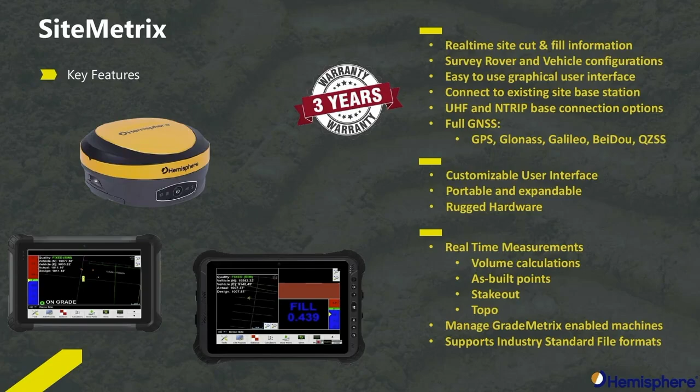The one unit controls your whole site. So what are the benefits of these features shown here? The first and major benefit is the ability to complete your own grade checks and stakeout work.

Jumping forward in the presentation, imagine if we could get you into a full base and rover solution for less than $350 a week. Keep this in mind as we go through the presentation. How many times do you pay for professional services for grade checking and restaking of marks? What is the minimum survey call-out fee? $750, $800?

If you have 1 day a week where you stake your own points, complete your own grade checks, or mark out your own trench line, you're ahead. This is before even taking into account speed, accuracy, and material savings. I'll give you some examples.

The excavator is ready to start the trench work for the sewer and water on site. What is the exact location of the pipe route? Call the surveyor? Why not set out the culverts and junctions and paint out the route on the ground yourself? The culvert invert has to be at an RL of 10.68 metres.

The excavator has been digging at the site you staked and is at the right depth, you think. Call the surveyor to check the invert, or maybe place your own rover into the trench and confirm that the invert is correct.

Of course, if you have a GradeMetrix excavator system on the excavator, it will naturally be correct already. The dozer has made a couple of passes along the crown of the road, attempting to cut as close as possible to the curb line.

All the pegs are gone. Drama? Call the surveyor? Why not just set the pegs back out yourself? But not before simply walking along the road to confirm that the position and height at the edge and crown are correct.

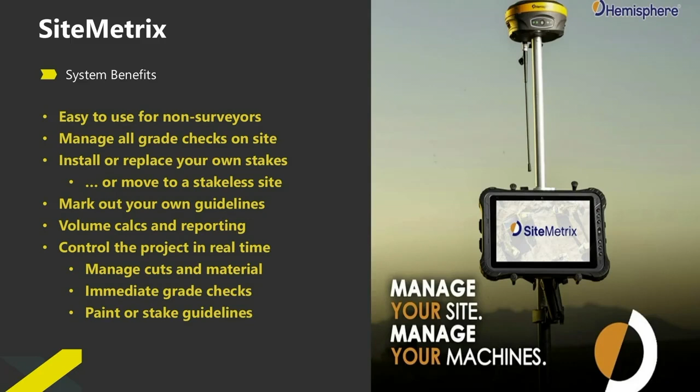Material costs are also dramatically reduced. You're not overcutting, which saves on waste costs and replacement material costs, and you're not undercutting, which saves on rework costs and time. With the SiteMetrix base and rover, you have complete control of your site.

This brings me to the technology section of the presentation. All constellations are provided in the sitemetrix and grademetrix solutions. On the top right, you can see 46 satellites being tracked from American, Russian, European, Chinese, and Japanese constellations. On the bottom right, you can see 22 satellites being tracked from GPS and GLONASS only.

So where is the benefit? On a clear site with no obstructions, there is no benefit. But what about normal working conditions?

If trees are filtering access to satellites, you need as many as possible to guarantee position and accuracy lock. In built-up urban environments, you need as many as possible to reduce the effect of multipath and blockages. And in urban canyons or mine environments, you obviously need as many as possible due to the limited sky view.

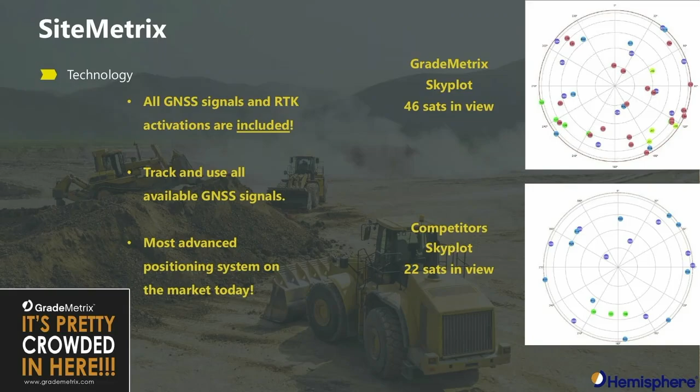The new C631 antenna is the highest level of technology available today. 800 plus channels are available for reception of all constellations as mentioned in the last slide. The receiver can be used with the inbuilt radio to receive corrections from the base or using NTRIP, utilising the inbuilt modem to bring corrections via the cell phone network.

All standard base station corrections are able to be received and transmitted if being used as a base. The system comes with dual hot swappable lithium batteries that allow the unit to maintain operation while batteries are changed and to last for a full 12-hour day.

While the aim is to create a simple and affordable site tool for the non-surveyor contractor or supervisor, full survey functionality is also available on board. A further point to mention here is the 3-year warranty.

Hemisphere has been in the market for many years and is the first choice supplier of GPS components for many OEM manufacturers. We know how to put components together. The rigorous testing we do gives us complete confidence to offer such an extensive peace of mind 3-year warranty.

The system is able to be supplied with either the UT20 7-inch screen or the UT50 10-inch screen. These screens are high visibility, high response touchscreens with integrated Wi-Fi, Ethernet, and Bluetooth, and are IP67 rated for water and dust penetration. The operating system is Windows 10.

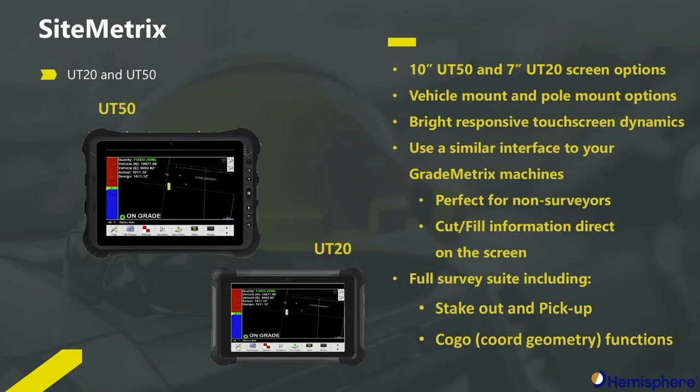We will now present an overview of the operating system of the Sitemetrix solution. Our American colleague Todd Medine has been kind enough to put together the following video to show you the functionality of the system. Note that the American measurement system is inches and feet, but the Australian versions operate in meters and millimeters, as you would expect.

Today, I will be running you through a brief overview of Sitemetrix. Sitemetrix is our site positioning solution used for numerous applications, like providing real-time cut and fill anywhere on the job. This is helpful in verifying accuracy of any machines using machine control, or in a more conventional grade checking format, where the user would write the cut or fill on the stake for non-GPS equipped machines.

Not only can we provide cut and fill, but we can also give the user capability to stake off of line work and points, providing more information like stationing, offsets, and precise horizontal locations like pipe inverts, building corners, and utility locations. I currently have a job loaded and connected to an emulated rover. This is what the user would see on the data collector.

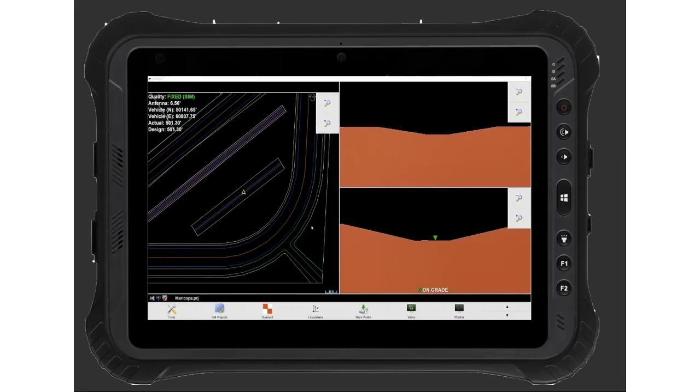The left box is the plan view. The lines represent certain features of the job, just like looking at a set of blueprints. You will see you and the rover represented by the yellow arrow. Wherever we walk, the map will update with the new position.

The text items in the upper left give us optional data like the pole height and the current elevation along with the design elevation. These can both be used to verify the accuracy of the rover in the field by finding survey set stakes and verifying that you match the surveyor.

Notice the north arrow in the upper right hand corner. When holding the data collector, you will face north to orient the plan view to the job. The scale bar on the bottom right will give a user a sense of scale depending on how far you are zoomed in or zoomed out. Notice when I use the zoom buttons, the scale bar changes.

In the upper right hand corner, you will see the cross-section view. This will take a slice of the surface that you're standing on and show you what it looks like from left to right. In this example, it appears to be a flat bottom ditch. The lower right is the profile view. This is similar to cross-section, but shows you a slice of the surface going from behind to in front of you. All three views can be adjusted using the zoom in and zoom out functions.

Watch what happens as I turn to the right. Notice how the cross-section and profile views change to represent the new direction. Plan view is great at showing you horizontally where you are at on the project. Profile and section will show the user what the surface inside of the project looks like in an easy-to-use graphical interface. Typically, the most useful piece of data is shown here on the lower right.

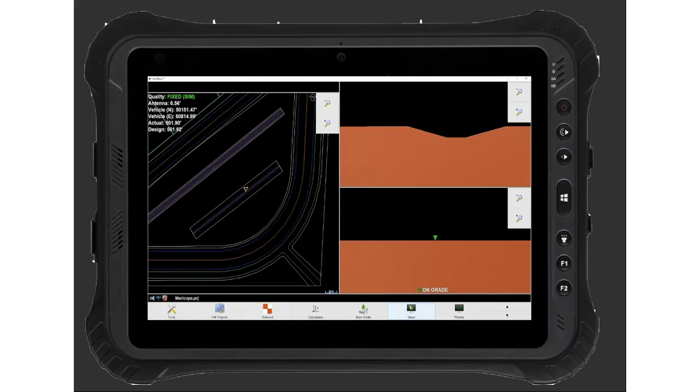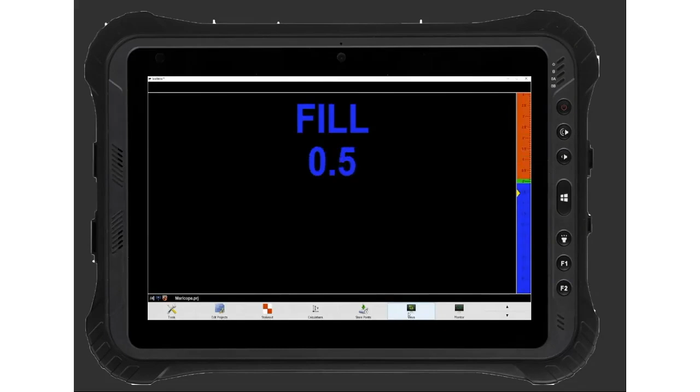The next view is Plan View only. This would be useful during a driving topo. This is the Cut Fill view, just about as easy as it can get. Give this to any new hand, and they can easily verify grade, or if the rover is not being used, it can be mounted to a foreman or supervisor's truck using our included quick disconnect and Ram brand data collector mounts.

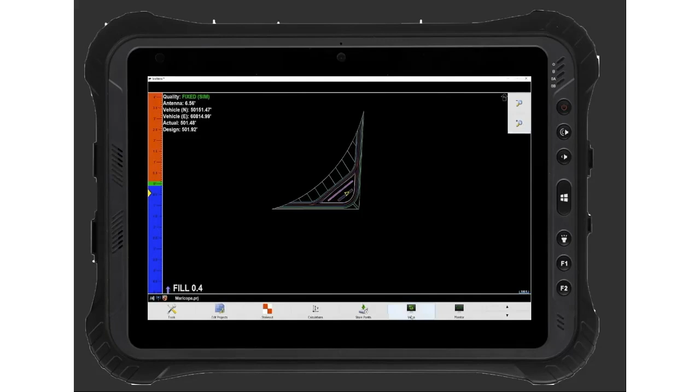And they can see what the grade is wherever they drive on the job. The next is Plan View with a large light bar on the side, indicating how much cut or fill you have left. Another good view for users or foremen and supervisors.

The final, and one of my favorites, is plan, section, and cut fill, giving you the best of both worlds, an easy-to-read, large, formatted grade indication, with two different views helping me keep track of the project in both horizontal and the vertical space.

When models are created for a job like this, it is generally built to a finished surface. This would be top of asphalt, concrete, or gravel, depending on the job and materials. The user would have to offset the thickness of the material to get the subgrade.

In the lower right-hand corner, you will see the up and down arrows. If we click on the down arrow, you will notice that the offset number changes 1/10 at a time. The cross-section view also has a new line going across it that represents our new offset grade.

If we have a large offset or a number not divisible by 1/10, we can manually enter the offset by going into Tools, then Options, then Project Options, and finally Vertical Offset. A negative number means that you want to go lower or cut more. I'll set it at a negative or cut of 1 foot.

This is now the job's default vertical offset. So now you don't have to worry about new hands forgetting to add the offset in the morning. It will automatically be done for them. Also, in project options, you can change the amount of each vertical offset button push. By default, it's set to 1/10. I'll change it to 1/2.

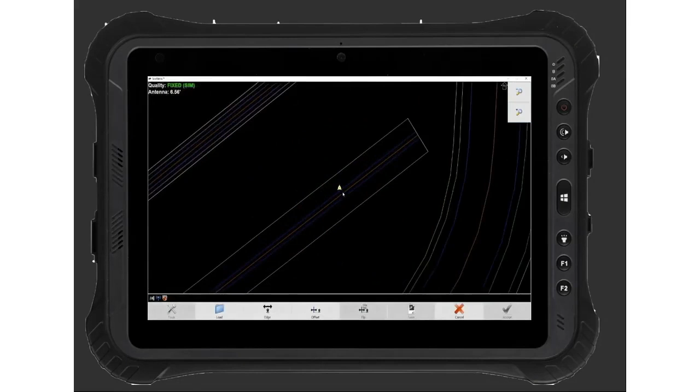Now it is asking us to choose the line that we want stationing and offset from. I'll choose the center of this ditch. Notice the arrows? This is telling us which direction is up station. If for some reason this is going the wrong way, you can easily reverse it using the flip button. In this menu, we can also offset the line.

If we wanted to cut 2 foot behind back of curb and the line was not already offset, you could do that here. A positive number would offset to the right of up station and a negative would go to the left. I'll choose a positive 5 foot here and press OK.

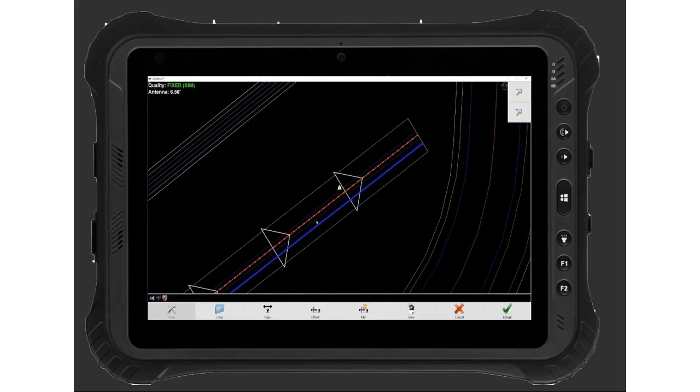Now you can clearly see the original red line I selected, and the new blue line is the offset that I added. This makes it easy for the user to verify that they have correctly offset the line in the proper direction. If I knew I would use the line again, I could save it and then load it when needed. I'll now press Accept, and you can see in the main screen views that I have a station and offset in the upper left corner, guiding me to my newly created guideline.

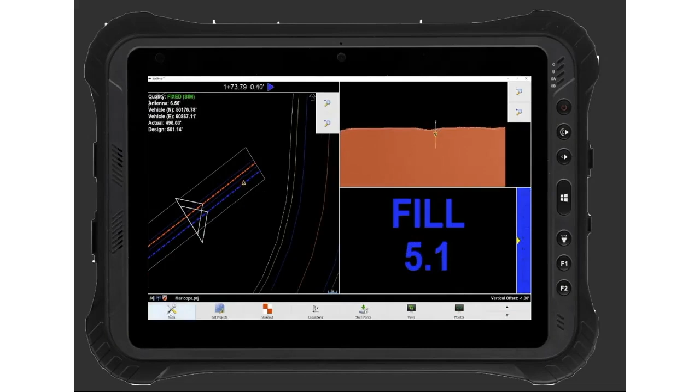We also have the ability to create simple designs in the field. If we go to Tools and take a look at Create Flat Pad, we could create a pad that extends out forever using the same elevation. The elevation can be assigned 2 different ways. The first is established by setting the rover on a known grade or stake and recording its elevation. The second way would be to just enter the elevation manually. Keep in mind that the job's elevation was assigned during the localization.

Create Slope is another simple to use tool that will allow more complex designs to be made in the field. Here, we have allowed the user to first create a design by using a guideline to control slope bearing, grade, and main fall. The user can then choose what kind of crossfall by either percent or slope ratio. Not only can we choose that on one side of the guidance line, but we can add a crossfall percent or ratio on the other side of the guidance line.

Using this, you can adjust the slope off of any line work you have loaded. This would be useful for road slope redesigns or if a contractor needed a place to get rid of extra material. If a model or localization is not available, we can use the rover to establish a baseline instead of using a guidance line.

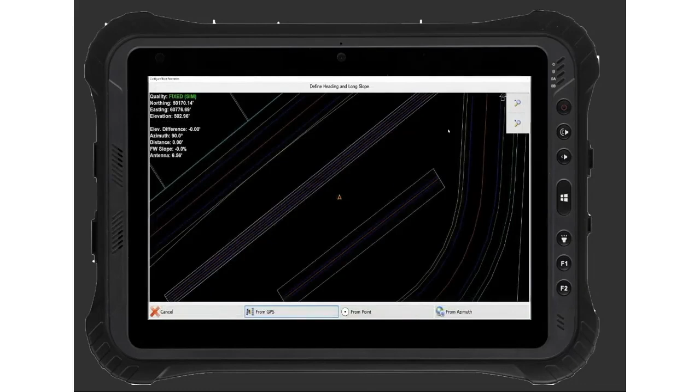To do this, we just record the 2 points that we'd want to use as a baseline. We can use the first elevation and a main fall percent, or use both elevations to tie 2 existing features together. We can project the main fall slope that we created both forward and backward from the established baseline. It will maintain the main fall slope that you have established.

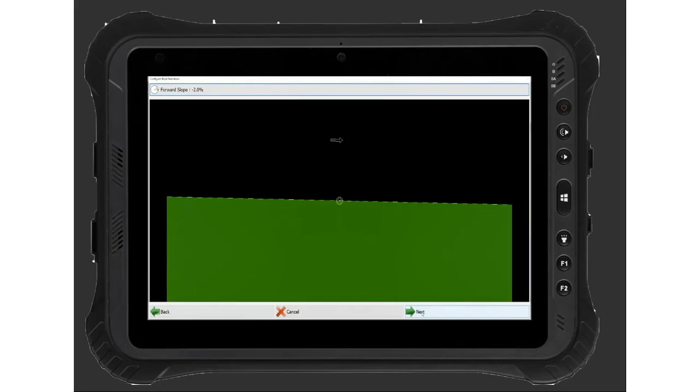For underground guys, the forward slope will hold the first recorded baseline's elevation, and you can dial in the percent here. For instance, if the first point we shot was the invert of a newly placed manhole, and the second shot was taken at the site of the next manhole you were digging to, you would just enter in the pipe's percent fall and the data collector would take care of the rest. If you shot the 2 baseline points on 2 existing features and you want to grade in between them, then leave this forward slope as is.

The next menu is asking you to create a cross-section template to the associated baseline. If this was for a pipe, I would leave it at no cross slope. This will give us a flat bottom trench with no percent fall left or right of the baseline. I would change the width to something more reasonable for a trench, usually the width of the bucket on the mainline excavator, plus a foot or two.

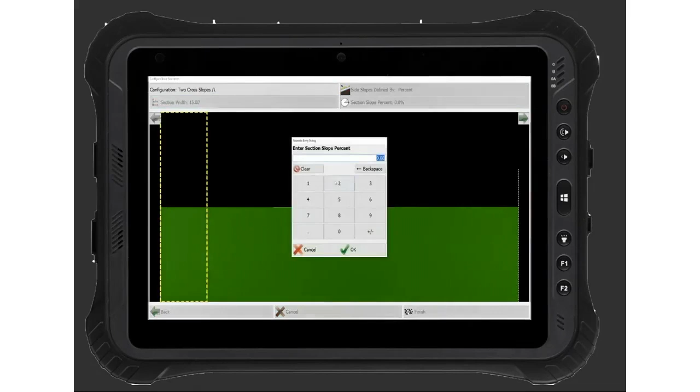If I wanted to build a road, I would tell the configuration I want 2 cross slopes. By default, the left is first. I'll give it a 15-foot wide lane with a minus 2% crossfall. Then I'll hit the arrow to go to the right side, enter in the same values. You can now see the cross-section view of the crown road. If you wanted to add more features like a V-ditch or a tie-in slope, we can add up to 6 cross slopes for a total of 3 per side.

Remember, the baseline is the more prominent dashed dot style line in the middle. I find it easier to build from the center out. I now have my crown road set on the left. I'll build a simple V-ditch. For inslopes, we usually use slope ratios instead of percents, which we have the capability to do. And just remember that the negative is going to lower the grade and a positive will raise it.

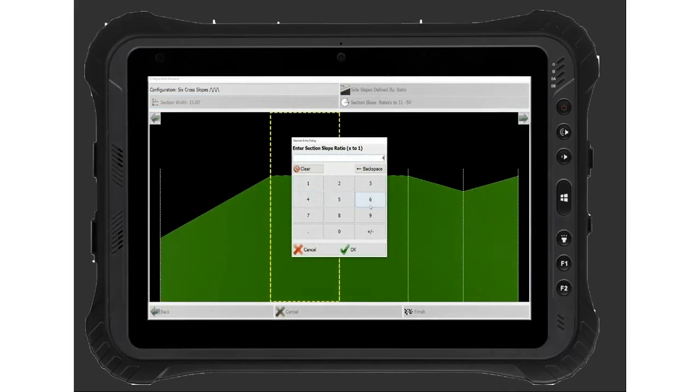On the left side, I will give just a simple tie-in fill slope of a 2-to-1 slope ratio, and I will make sure that I extend it out far enough to catch the daylight at the bottom of the slope. If you don't need the last cross slope, just give it a width of 0. Notice, if I change the middle cross section to a different percent, it'll update all of the cross sections behind it. Once I press finish and move to the newly created design, you can see that we have built a complex road with minimal effort.

We can also edit the slope using the buttons on the bottom of the screen, and we can also save it for future use. Sitemetrix also contains a full topo suite that will allow you to record a precise point both horizontally and vertically. Doing this will give you the capability to record any of the existing utilities marked by the local utility companies before they are wiped out, or even worse, marked in the wrong location.

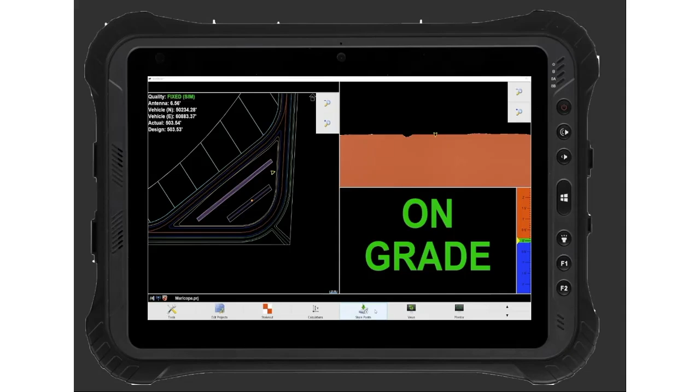You can topo existing ground in a 30 to 50 foot grid. This will give you a surface that you can then use to compare the existing ground to the proposed grade to verify your and/or the engineer's earth moving quantities. This would also be useful for tracking and billing time and material jobs. When the job is complete, you can use the topo feature to record and then hand in professional looking, accurate as-builts with all of the material quantities, done directly from the data collector.

To use this, we start in the main screen views and select Store Points button. Coordinate file is where we'd give the topo a name and save it. This will keep the data neat and organized. Either select the existing file you want to add or create a new file. Description can be used for features like manholes, pipe inverts, and fire hydrants. AutoStore will let us select distance or time to shoot between 2 points automatically. This is useful with large site topos where you can use a truck, four-wheeler, or UTV to drive the site while shooting a topo instead of walking it.

Now, in the main screen view, you will notice that the view and buttons have changed. To store a single point manually, select Store Point. If a description is needed, we can go back into settings and force the user to select a description by checking on the prompt for description. Now, when I record a point, it will ask for a description.

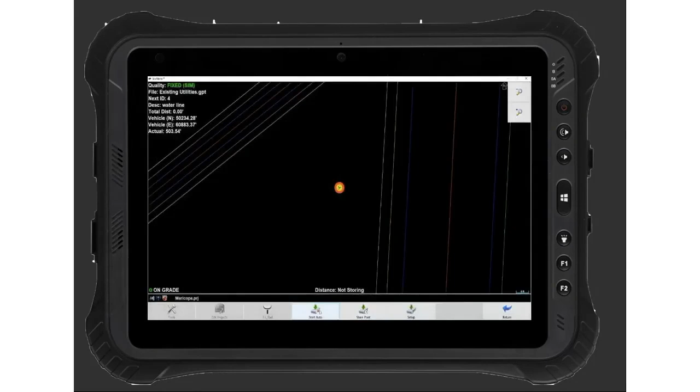For a driving topo, just click on the Start Auto, and when I start walking or driving, Sitemetrix will automatically record the points based off the time or distance settings that I gave it earlier. If using a truck, four-wheeler, or side-by-side, you can click on the button to Pickup Truck. This will also change your pre-saved rod height so you don't drive a 100-acre site just to realize you forgot to change it and all of your points are off by 2 feet in elevation.

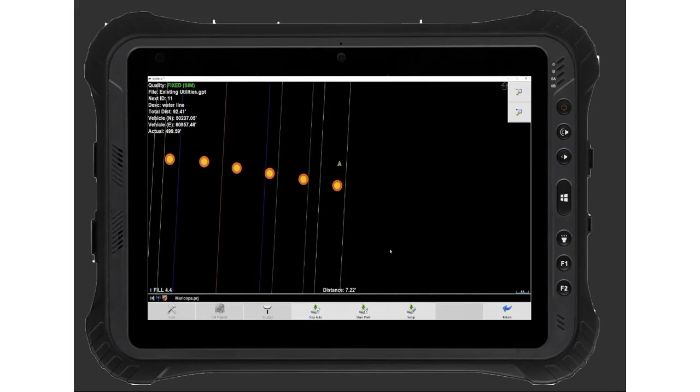Due to time constraints, I cannot go into every single feature that we have inside of Sitemetrix, but I'd like to give you some insight of the more advanced features that we have to offer you. In volumetrics, we can easily give you the quantities of stockpile and also compare 2 different surfaces for quantities. Along with this, we have the ability to save the volumes to a PDF from the data collector.

Almost every single aspect of the software can be customized for you. We can change what the bottom buttons do. The background, surface, and light bar colors can be changed. We can choose which layers you see in the line work of the plan view. You can change any of the text in the main screen views. You can even change the size of the text. All this makes it easy to configure a rover for a new user with limited options, or a power user can make Sitemetrix perfectly suited for their individual workflow.

You also have the ability to password protect certain settings, jobs, and features to keep rogue button pushers from getting into trouble. We import and export numerous different file types, from everyday DXF and DWGs to Topcon proprietary formats for customers with mixed fleets.

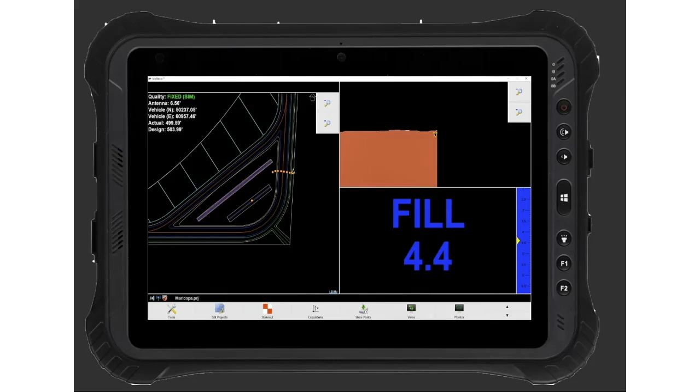Okay, so now to the summary. Hemisphere is very pleased to be releasing the SiteMetrix solution that you have seen demonstrated here today. It offers a new mark with regard to performance and simplicity at an affordable price and is available for evaluation through our dealer network today. The affordable price point makes the system a viable investment to unlock efficiency and cost savings on your site. The barrier to entry for a large sector of the contractor market is now lower, opening this valuable tool to a larger audience for whom the price has previously been prohibitive.

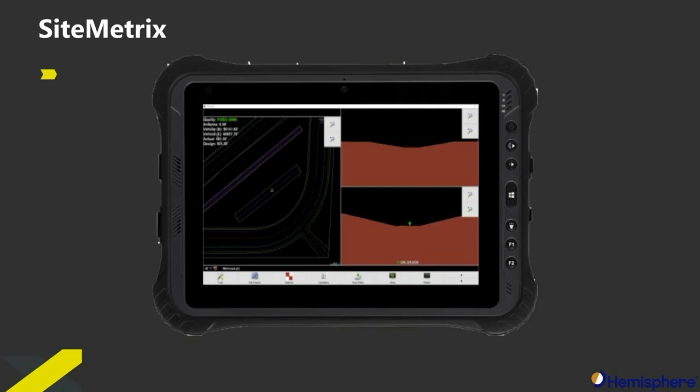This value is provided without an array of costly options. For example, it comes complete with full constellation tracking with no extra costs. Site setup is very simple, either at your own site or joining to an existing site, and the user interface is designed for non-surveyors but with full functionality. How much can you save by completing your own checks and stakeouts without having to understand a complex survey tool? The value calculation could be as simple as, can I save one survey site visit per week? If so, consider a unit, as the weekly cost could be less than the minimum survey call-out fee.

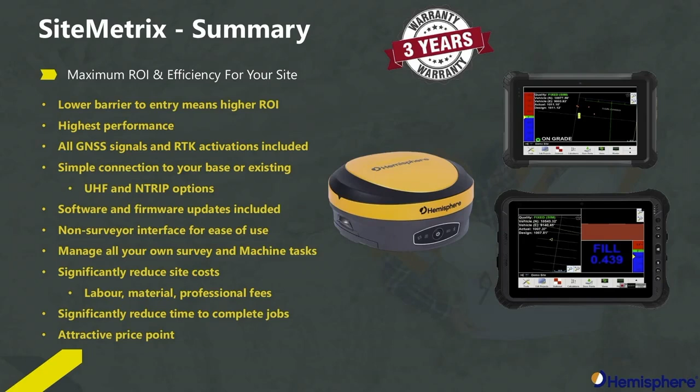And then consider the full story. Your site costs will see a significant impact due to the benefits of increased accuracy, faster completion to design, less fuel, less material, and less external professional fees. And this will ultimately become less time to complete projects and more profit. So what is the price point I've been referring to? The SiteMetrix solution is available to you through our experienced dealer network at a price of less than $38,000 for a base and rover system, or less than $25,000 for a rover-only solution. These prices include all options and a 3-year warranty.

I'd also like to add here that we will soon be announcing a finance solution that will allow you to spread your purchase over an extended period. If you can save one survey visit to site per week, costing maybe $750 for a minimum call-out fee, and the system costs about $350 a week, would this be interesting? And you own the system in 3 years, the goods being under warranty the whole time.

So in conclusion, contact your dealer or contact us and we'll put you in touch with one of our partners. Invest 15 minutes of your time finding out how fast we can have you trialing a system and starting to save money. You should also be aware of the government stimulus initiative currently available for purchases before June 30 this year. All acquisitions can have the entire cost depreciated this year. If you purchase the system this year, you get your tax back within months.